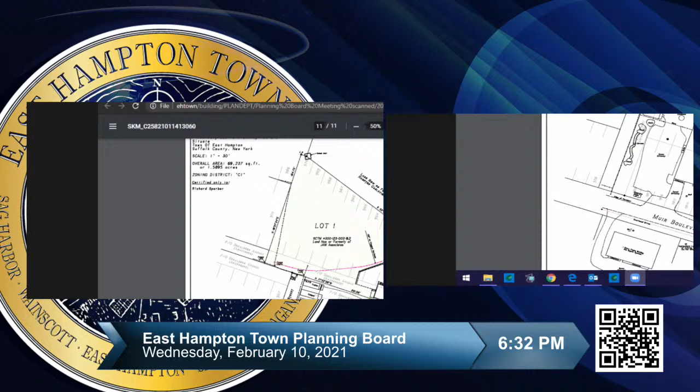Okay, I'm going to put on the screen so everyone should be able to see the lot line modification. An application has been made to modify the lot lines of 80 Old Fireplace Road and 68 Muir Boulevard, represented on the surveys as lots 1 and 2 respectively, to transfer a strip of land of approximately 3,740 square feet from 80 Old Fireplace Road to 68 Muir Boulevard. Both lots are zoned CI, commercial industrial, are partially cleared with improved structures, and located within the Pine Barrens region.

A site plan/special permit for 80 Old Fireplace Road was approved in 2006; however, a valid CO has not been issued at the time of review. A site plan/special permit for 68 Muir Boulevard, named the Sperber Old Fireplace Road site plan/special permit, was reviewed and approved by the planning board in 2019.

The survey appears to depict a stone driveway in the area to be transferred that is not part of the approved site plan for 68 Muir Boulevard. It appears this transferred area is intended to be utilized by the applicant for their commercial business. If the additional lot area is to be integrated into the lot, the site plan should be modified to reflect that. The applicant's narrative has indicated that the previously approved site plan will be modified to construct a building of a slightly different size and shape should the modifications be made to the lot lines.

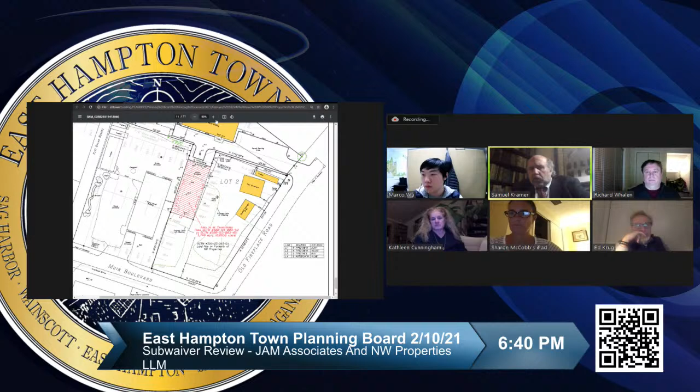Okay, any questions that you may have for me? Let's hear from the committee, and then unless somebody on the board had a question for Rick right now, let's hear from Sharon then. Yeah.

No, this lot line modification makes a lot of sense to me. There's no reason not to — JAM, who's giving up the piece, keeps its lot size in conformance. And then the other one, which is smaller than we'd like, would just add to that, which makes sense. Again, it would make it a more regular size. And if they can move the building away from the property line, again, yeah, I don't really have much to say about this.

I think it makes a lot of sense. Having a drawing of the building might help, but overall you still have to come in front of us with a site plan for us to even consider it. So at this point, in terms of just the lot lines, I think it makes a lot of sense. They're going to have to modify the 68 Muir Boulevard site plan anyways. And if they're coming in with a different site plan, just do it all at once, right? Yeah, it's kind of treading old ground, but in the long run, it'll be better off.

Well, we'll see if we even need them to bring a building drawing. All right, does anyone else have any comments on this?

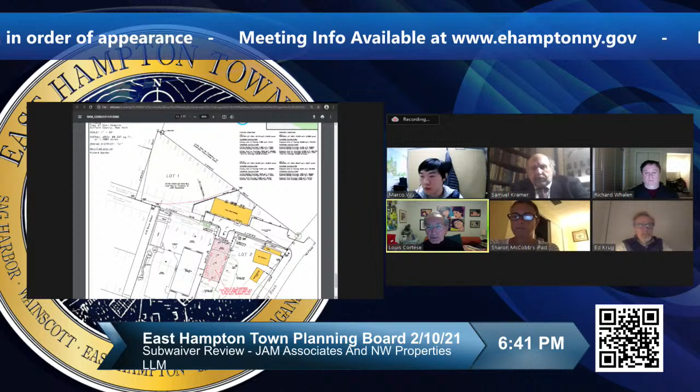Anybody on the board? Rick mentioned that they need to get the health department approval. Why do you need that approval, Rick? The health department requires approval for any lot line modification. They treat lot line modifications the same way they treat subdivisions, so if you adjust or modify the boundary between any two or more properties, you need Suffolk County Health Department approval.

I think the purpose is they want to make sure you don't put your septic system on the wrong lot or in a place they wouldn't otherwise allow. If they had no oversight over the process, people could do things involving their septics that the health department otherwise would not want to occur.

Lou, I'm thinking about a site plan we saw up in the Springs where somebody's septic was on their neighbor's property. I guess Suffolk County doesn't want to encourage that.

Randy, you had something? Question for Rick - this is really about facilitating the applicant's review. I'm wondering, do you guys already have health department approval on the site plan on 68? That's a good question, I haven't looked at it for a while. We certainly applied to the health department, but I honestly don't recall whether we got health department approval on the site plan.

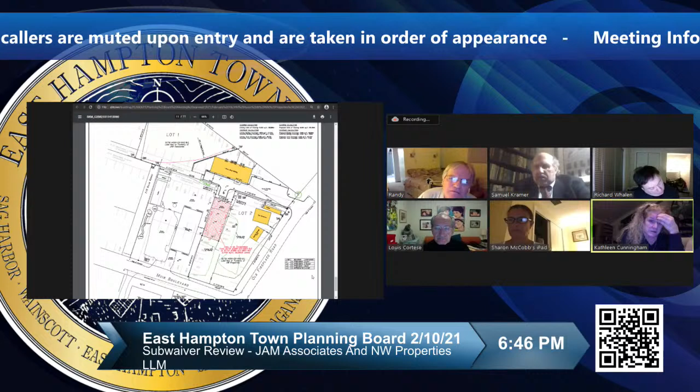My only other concern is that once this is completed, which I hope it will be, allowing lot 2 to grow by this little strip, that the subsequent site plan will continue to divide these two lots rather than make them functionally one big lot, because that's a concern I have with adding this property - that presently that strip of property prevents that from happening.

Mr. Chair, let's hear this and then wrap up. Go ahead, Rick. I understand what Member Cunningham is referring to - the narrative we submitted, the second page of the narrative was wrong.

It was an earlier version that got submitted. Okay, thanks, that's why you saw that. That's fine, I appreciate that. You corrected that - stuff like that happens. You'll resubmit that, Rick, because that was the information I had. I just wanted to make sure we weren't skipping over something since it came from the applicant.

So that's my only comment there, the concern that it'll become one giant lot. Okay, well, Rick, the underlying ownership - are they identical?

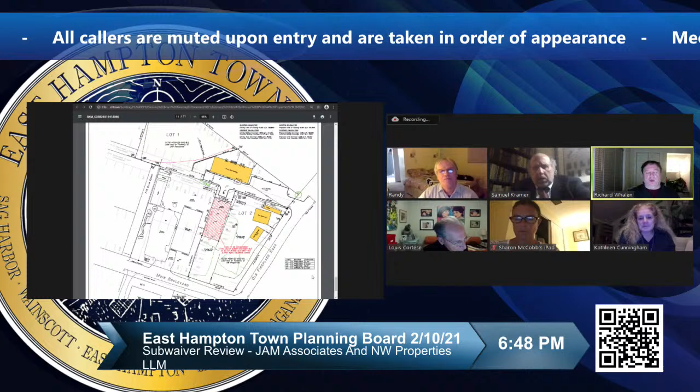No, the westerly lot is owned - they're both Rich Sperber. I don't know for sure if he's the full owner of both, but Rich Sperber is an owner of both. The westerly lot is owned by RCS Properties. So Rich Sperber has an interest, and I think a controlling interest, in both properties.

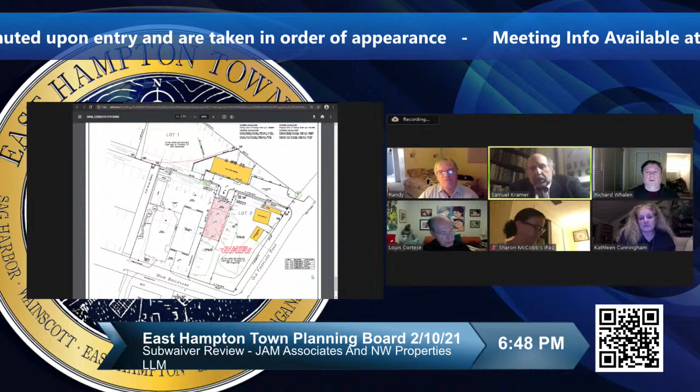To address Member Cunningham's concern, we don't intend to have them cross-linked. That's my concern as well - I don't want to go through the back door of consolidating and making some mega lot here. No, that's not proposed to happen. Well, not proposed, but as a practical matter, one way or the other, that can't happen.

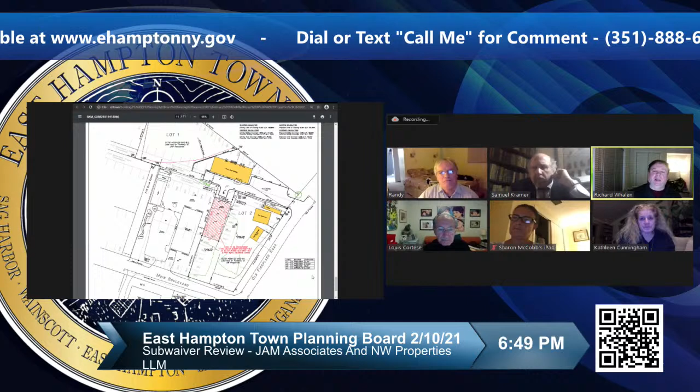Let me just explain. The site plan that you approved on lot 2 - our intention is that we have a slightly larger lot. We would rationalize that building, make it a rectangle. Access will still come in from Old Fireplace Road. We're not going to propose a connection from lot 2 to the RCS property. That's not intended. Okay, that's that. Thank you.

You can put two CI lots together and have a site plan on a 2-acre lot - we do it at the industrial park - but what we're hearing here is there's two lots, two site plans, and they're not related to each other. That's correct, and Sperber Landscaping uses both lots, I believe, but that's basically it. Yeah, that's the big issue, making sure it doesn't become one mega lot. That's really my concern. No, I'm with you on that, Kathy. Thank you very much.

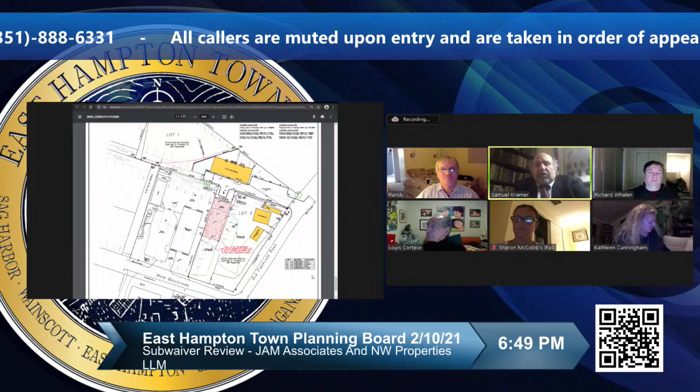So we'll look to hear from you after you take this a little further down the road. All right, next is New Cingular Wireless at Town Hall.

Thank you, I'm representing T-Mobile. Wait, T-Mobile was the 258 Springs Fireplace. Right. So you said, going back to Cingular - that later.

Is Pamela who's the attorney or the representative for New Cingular Wireless? That is Matt Lindblom, I think. Do I see him there? I apologize, who am I looking for? I apologize, Matt Lindbaum, I don't see him here. We do not have Matt in the waiting room right now.

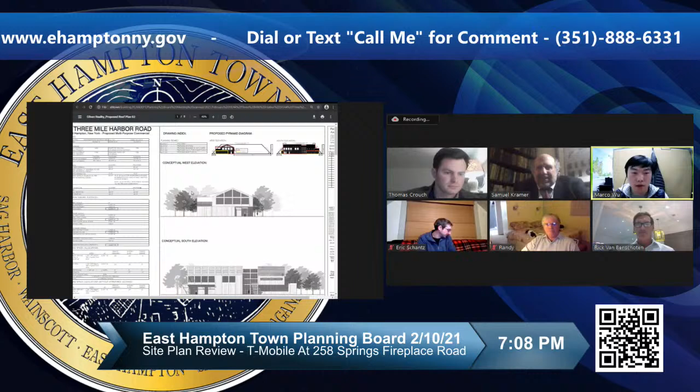Hey, everyone should see it now. Okay, so application has been made to change the use of and expand a non-conforming building by proposing a second floor office space, paved parking space, and extensive landscaping.

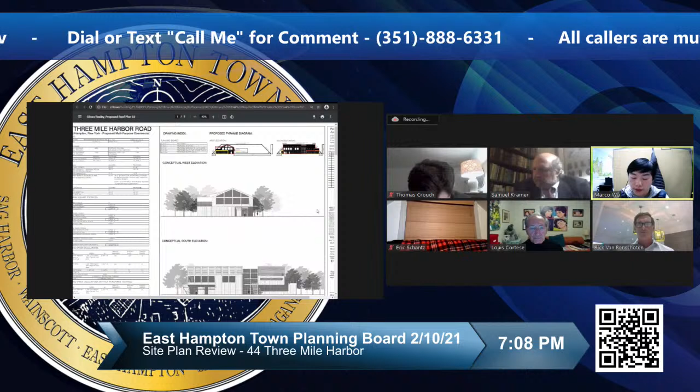The project consists of a 6,659 square foot first floor retail space for a wet retail market, and a 5,968 square foot second floor for 2 office spaces and 2 affordable housing units. A total gross floor area of 12,627 square feet, not including a 6,659 square foot basement and a 1,496 square foot wood deck.

The project has decreased their square footage on the first floor by roughly 200 square feet and increased the second floor by roughly 1,700 square feet. A separate loading zone, revised parking lot circulation, and landscaping along 3 Mile Harbor have also been proposed. The parcel is zoned neighborhood business, cleared of naturally occurring vegetation, and borders a residential zoning district to the south and east.

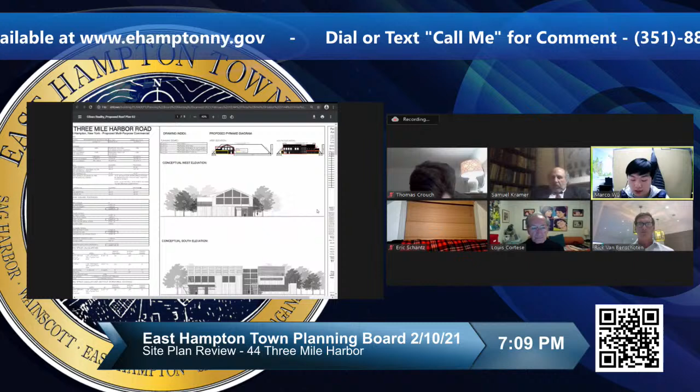Marco? Oh yeah, I'm just zooming in, sorry. Got it. That's all right.

So moving forward, the maximum permitted building coverage is 40%, or 13,985 square feet, and the proposed 6,659 square foot building complies with zoning.

The existing total coverage is 30,135 square feet, where the maximum permitted is 24,473 square feet. The application indicates that the proposed coverage is 25,577 square feet, which remains above the maximum square footage permitted, although it reduces the current non-conforming coverage by roughly 4,500 square feet, and would not require a coverage variance due to its reduction from the current non-conforming numbers.

The existing building is pre-existing non-conforming with regard to setbacks on the northern and eastern side. However, it appears that a proposed staircase to the second floor addition, located to the north closest to the road, is situated within the required side yard setbacks and will need a side yard setback variance.

The parking proposed on the southerly side is close to the property line and does not meet the 30-foot setback requirement based on the double setbacks as it adjoins the residential district. There is a proposed 5-foot landscaped buffer between the parking spaces and the residence.

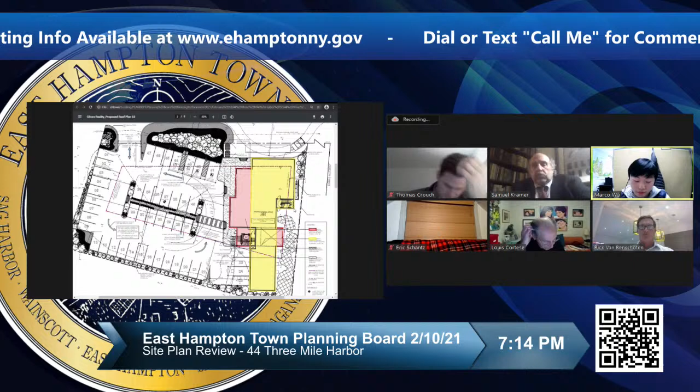All exterior light fixtures must be fully shielded as the same is defined in section 255-1-20 of the town code.

Landscaping beyond the property line and alterations for the proposed access way will require review and approval from the Suffolk County Department of Public Works. An application should be submitted to the Department of Public Works with their improvements and preliminary comments provided to the board.

No formal existing or proposed sanitary plans has been submitted. The applicant has submitted an engineering report from P.W. Grosser Consulting regarding the applicant's current sanitary system. It appears that the applicant is seeking to maintain their grease trap and leaching pools whilst upgrading the septic system to 1 new Fuji Clean CEN21.

It appears it is an IA low nitrogen system, and the applicant should submit a survey to the planning board depicting where the existing and proposed sanitary systems are located. A complete sanitary plan illustrating the location and design of the proposed sanitary system, as well as complete calculations, must be provided to the planning board.

As per Chapter 210-3-2, an IA low nitrogen system would be required for the project. Based upon these calculations and the requirements of the Suffolk County Sanitary Code, the sum of the proposed uses would have an approximated generated sanitary flow of 880 gallons per day. The total allowable generated sanitary flow for this 0.8 acre parcel in Groundwater Management Zone 5 is 240 gallons per day. It should be noted that all commercial properties are allowed a minimum flow of 300 gallons per day, regardless of the size of the parcel.

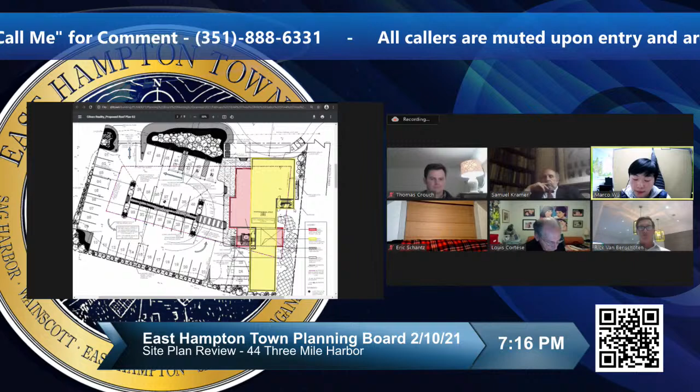The applicant has submitted a copy of an approved food establishment permit from the Suffolk County Department of Health Services, dated May 22, 1994, that states that the maximum occupancy at the time was 360 persons and has indicated an allowable 3,600 gallons per day, which is 10 gallons per day per occupant.

The applicant has indicated that the site is grandfathered for 3,600 gallons per day of flow. However, a recent revision to Article 6 of the Sanitary Code appears to have eliminated grandfathering sanitary flow when a site has been vacant for 2 or more years, and a variance may be required. The applicant should provide additional existing and proposed sanitary information as mentioned above. A condition of site plan approval will be approval from the Suffolk County Department of Health Services.

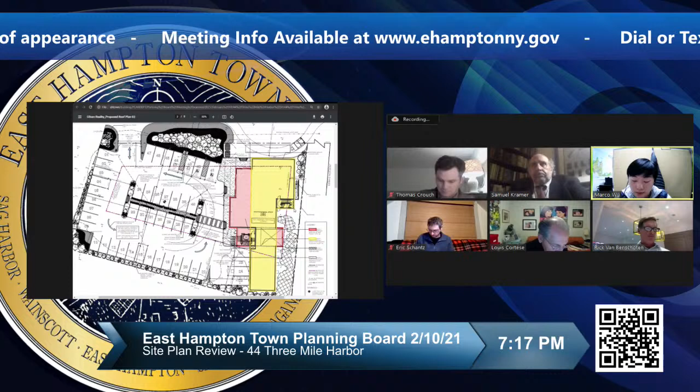No additional drainage or runoff mitigation plans have been submitted at the time of review. Spot elevations indicate that the middle and southern parts of the property will be the lowest areas. The applicants should provide a drainage plan with drainage calculations and structures in their project, that will mitigate impacts from potential flooding. A certain list of plans that have been omitted in the original application submission should be submitted as part of site plan review.

Survey of existing buildings, structures, and uses with lot area and floor area for each floor. Revised survey that depicts the applicant's proposed improvements and alterations. Revised site plan that depicts all existing and proposed sanitary and drainage systems. Elevation drawings, east and south, west and north. A lighting plan as detailed above, and a landscaping plan as detailed above.

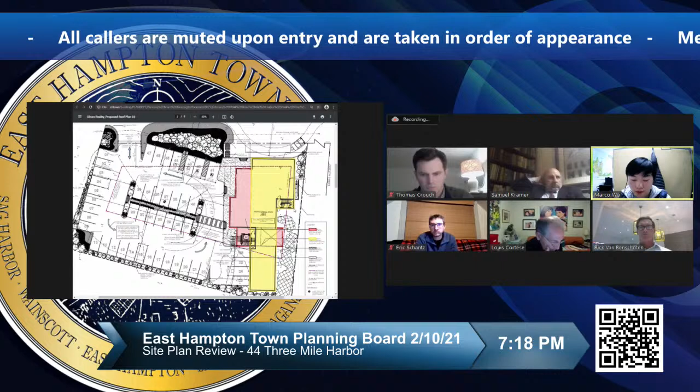The planning department has not yet received comments from the chief fire marshal regarding fire safety or ADA compatibility at the time of review. The proposed project will require approval from the ARB, and an application should be submitted to this agency if the applicants have not already done so.

The second floor will have a gabled roof with a height of 35 feet. A portion of the roof above the offices have been proposed to install solar panels, and a portion of the roof above the apartments have been proposed to be a wooden deck. No information has been submitted regarding the color of the building or materials used for siding.

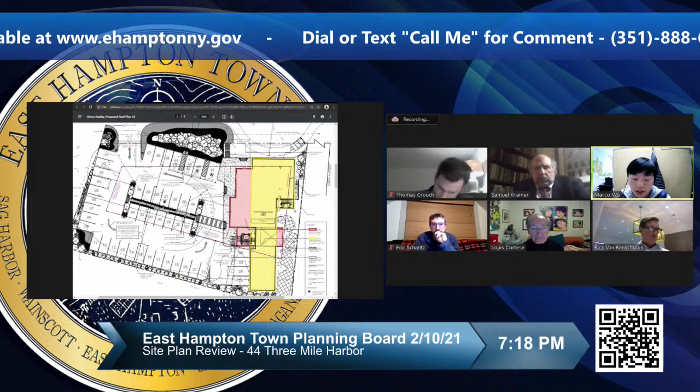In conclusion, the revised plans have made alterations that include changes to the size of the building, changes to the layout of the parking lot, the need for a pyramid law variance, and the inclusion of 2 affordable apartments. There are remaining concerns the applicant should address, including sanitary flow information, limited parking spaces, lighting near residential districts, and changes within the jurisdiction of the Suffolk County Department of Public Works. Variances required are a pyramid law variance, a setback variance for side yard, and a parking variance.

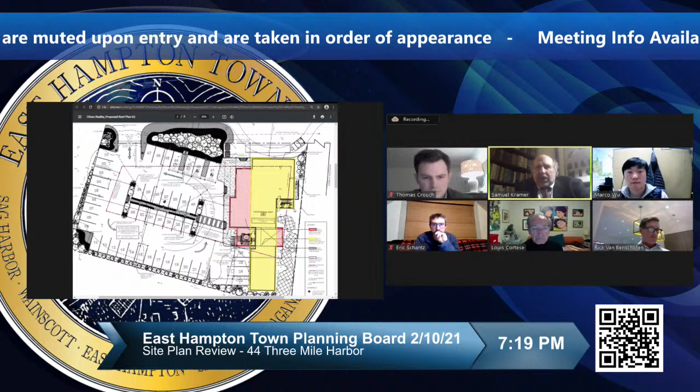Thank you for that very thorough and helpful report, Marco. Appreciate it. Does the applicant wish to be heard?

Mr. Chair, I'll speak first. Richard Whalen. I haven't been previously involved in this site plan. The architect, however, Pamela Glazer, is here tonight, and so is Rick Van Benschoten, who is the owner. So you've got 3 people here tonight. If there are questions better answered by Pamela, I'll have her address those matters.

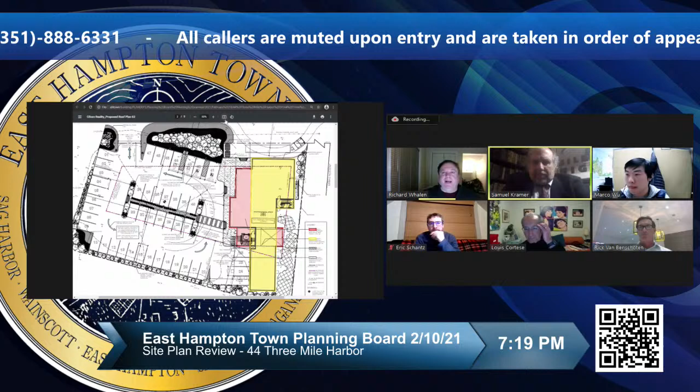I have been involved with the property in the past. I represented Sylvan Realty over a decade ago before the town board when the property was rezoned from commercial industrial to the current neighborhood business zoning category.

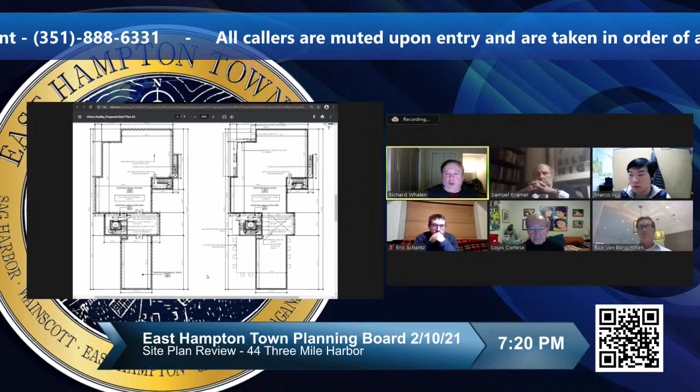Just some quick comments on Marco's memo. First of all, as Marco noted, there are no coverage variances needed for the project, and in fact total lot coverage will decrease substantially, by about 5,000 square feet. The current proposal does show the stairway to the second floor that would encroach currently into the northern side property line. I've spoken with Pamela—we may be able to adjust the plan, revise the building design. You can see there on the right, the yellow with the staircase, because that is 2 stories in height.

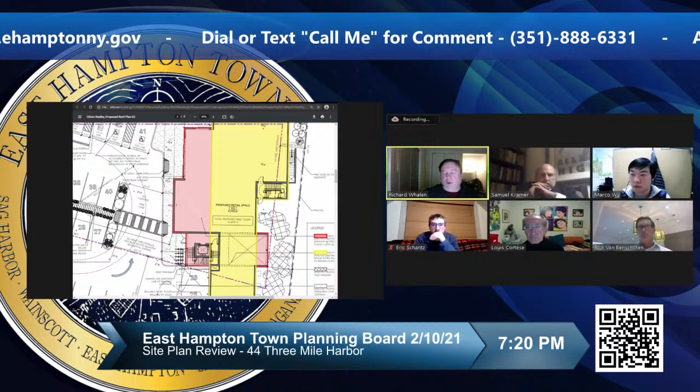So we may be able to pull that back. The second story there is new, and if we can retract that into the building, then we would avoid a side yard variance. So we may be able to do that. You're talking about that little bump out on the side? Yeah, right where Marco has the cursor. So we may be able to pull that into the building, if you will.

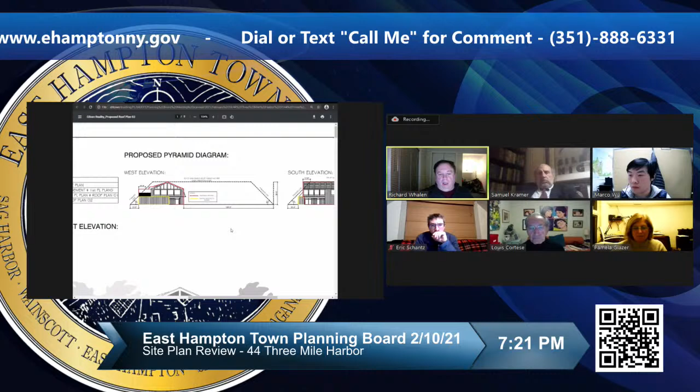Or rotate it, probably. I'm not sure that we can eliminate the pyramid law setbacks. We might be able to minimize them somewhat, but the pyramid law setbacks are kind of a combination of the gable ends—you can see that's a gable end, I think facing the road. So the gable ends, the ridges encroach within the pyramid law, and our decking, our second floor decking, the railings are within the pyramid law. If we can avoid and minimize those, we will, but I'm not sure we can completely avoid the need for pyramid law variances.

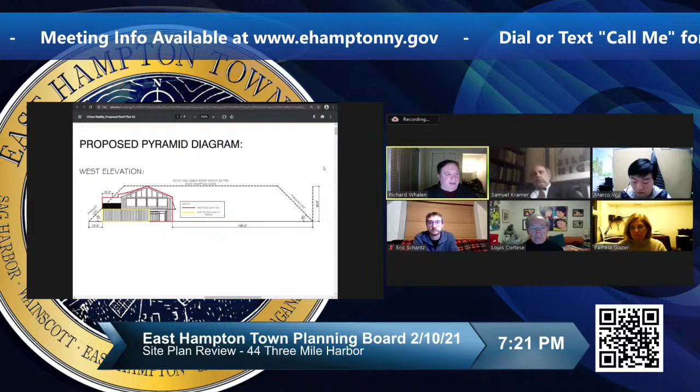And regardless, we are in a position where we would need a parking variance of 11 parking spaces, so that would send us to the Zoning Board of Appeals regardless. We accept the correct number of required parking spaces as 58, not 59, as Marco noted. The existing number of spaces on the property has never been properly calculated—I remember this as an issue even back when I represented the applicant in the rezoning.

The current parking lot, as you know, is unpaved and not lined. It predates zoning, it predates site plan review, so there's no actual approved site plan layout. And so we don't really know the number of parking spaces that we have right now.

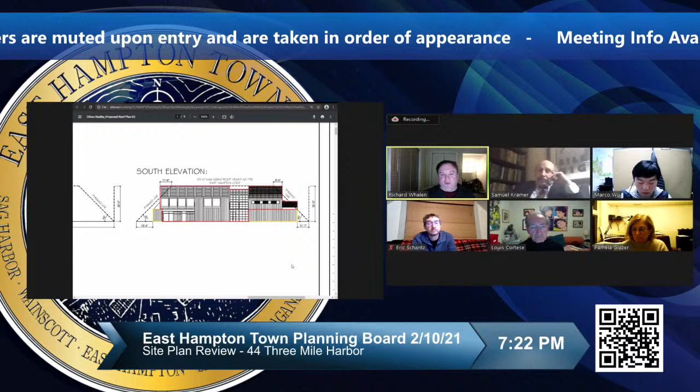The loading dock—Marco's memo asked questions about the loading dock. We can't really tell you the hours of operation or the number of trips that will be employed concerning the loading dock because we don't know who the retail tenant will be. I think as a board you should assume, in accordance with typical delivery practice at retail stores, especially if it's a food retail store, you'll get deliveries early in the morning. Trucks and tractor trailer trucks will try to arrive often before the store is open, so you should anticipate early morning use. Beyond that, I can't really say much because we don't know who the tenant will be.

We do understand we'll need Suffolk County Department of Public Works approval for the landscaping in the Three Mile Harbor Road right of way. We do believe that can be obtained, but we will have to work with the DPW on that.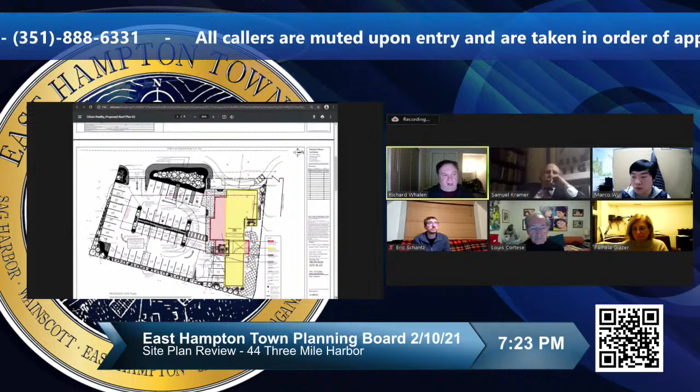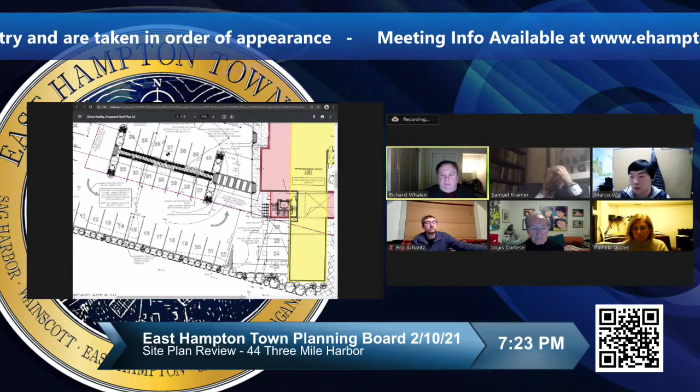Likewise, we will need Suffolk County Health Department approval, and the issues that Marco raises in the memo concerning the pre-existing sanitary grandfathered flow on the site are important. But we will address that with the health department, and we will supply those comments to the planning board.

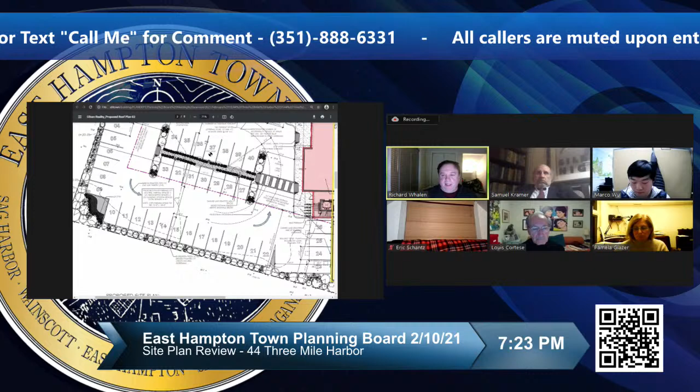I'll note that of the 880 gallons per day currently proposed in the site plan, a large proportion is attributable to the 2 workforce housing units, even though they're only one bedroom each. We'll provide additional detail on the drainage plan and calculations.

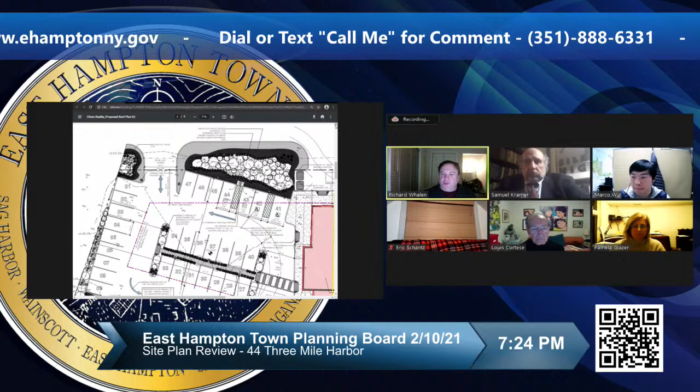We think it's premature at this point to provide more detail with regard to the landscaping and lighting plans. We need more certainty from the planning board, not to mention getting a variance from the zoning board for the number of parking spaces. We need more certainty from the board on the likelihood that this project will be approved in its current configuration, and I hopefully will get some feedback from you in the next few minutes.

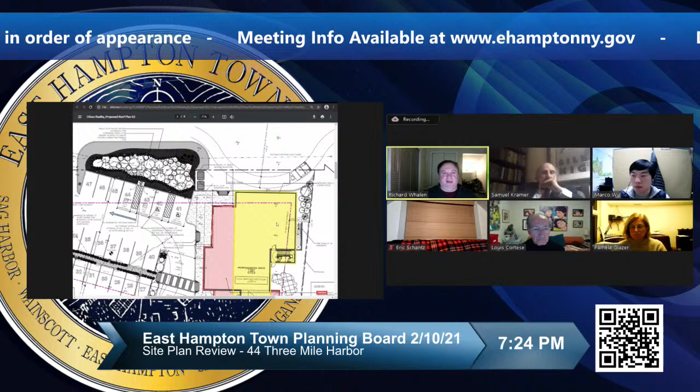Suffice it to say that we're confident we'll provide a landscaping plan at the end of the day that you'll be satisfied with, and a great improvement over what's there now. Similarly, we'll have a dark sky compliant lighting plan you'll be happy with. I don't think there's any doubt we can do that, but those would probably be housekeeping measures towards the end of the site plan process, at least how we see it.

It's a big parcel, and lighting and landscaping are crucial, you have to approve it. So we think we'll be able to satisfy you. But before we design those things, those are somewhat time consuming and expensive to get into. We really want to know where the project is going before we get to that point.

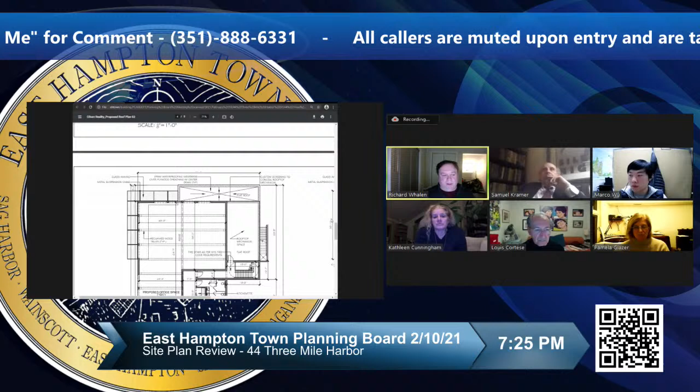I would just wrap up by saying there are significant benefits associated with the plan as proposed. It's going to be a much better site appearance. You'll have a safe, very well-designed parking lot. I think the layout of the circulation within the parking lot is very sound design, again a considerable improvement over what's there right now. There'll be improved drainage and landscaping.

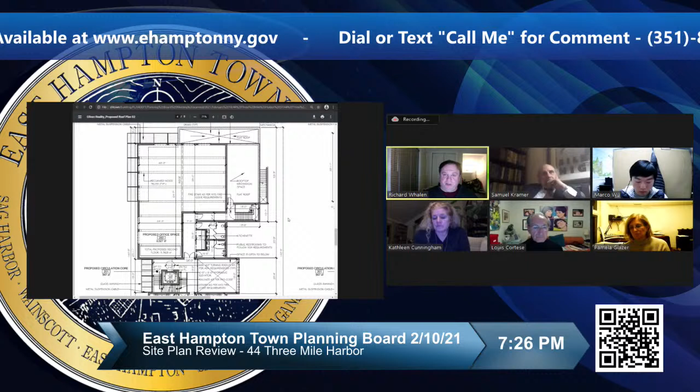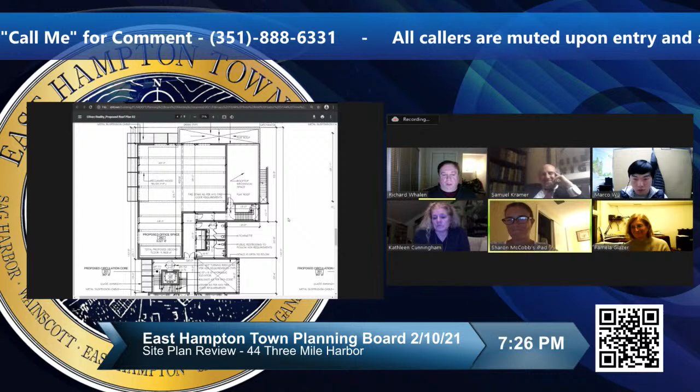There'll be a new low nitrogen sanitary system on the property. There will be dark sky compliant lighting. There'll be 2 workforce housing units as currently proposed. And also, finally, there will be the permanent discontinuance of the nightclub use, which the town has long wanted to disappear. So those are my comments. If any other questions, I'm happy to answer what I can. And again, as I said, Pamela Glazer is here as well.

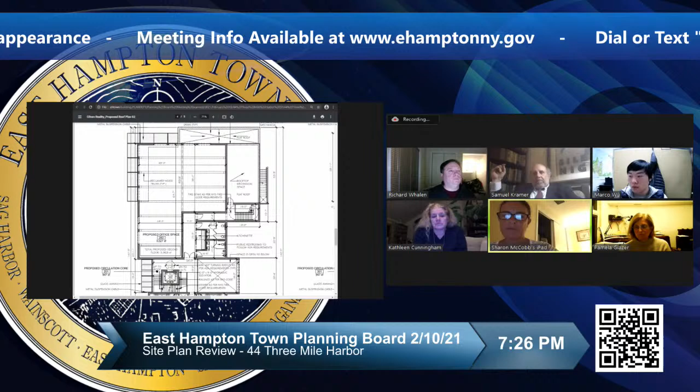Yep. So I just want to first thank the applicant and everybody for really working on this. What I'm looking at right now is a huge improvement from what we saw 3 or 4 submissions before, and it's looking pretty good.

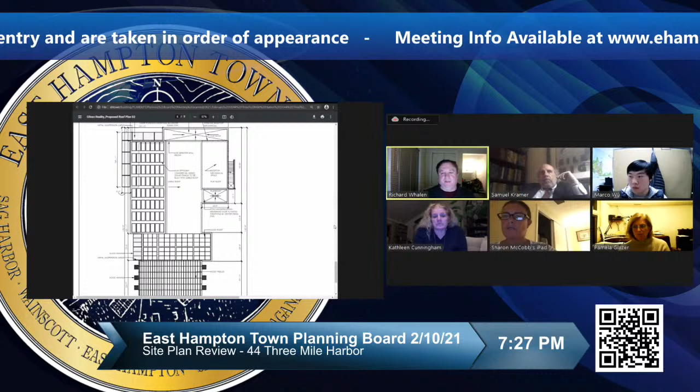I guess one of the biggest questions I have, if the sanitary system and the drainage structures are not on this drawing, how do we know that this still all fits? Let me just say, I forgot to mention, we do need to supply you with that, the drainage. I said we'd provide more detail on the drainage plan that would include the location of the sanitary system.

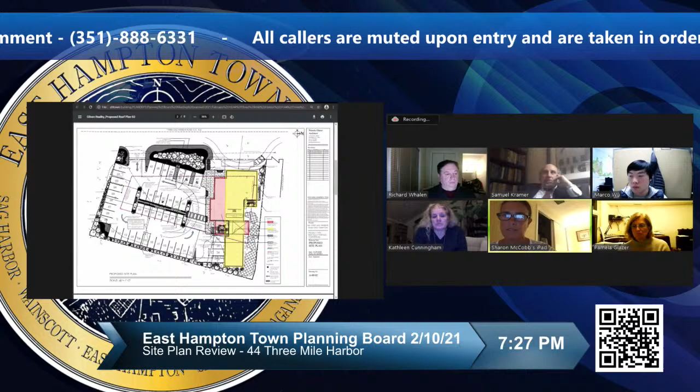Because as we've gone through this, we're slowly warming up to the idea of less parking spaces. But if the drainage structures and the septic get involved, and all of a sudden we've got even less spaces because of those 2 big items, then we're not really looking at the right plan here, I guess, is my concern.

I think, like I said, it's an improvement from what was there, right? The landscaping is going to buffer the parking from the residences. You've reduced the size of the building. The parking lot is going to actually work now. You've pulled it away from Oakview Highway, which is, I think, a huge improvement. Having those 2 affordable apartments, I know makes it so that you have to provide 2 extra parking spaces, and then sort of does something to your sanitary flow, but we appreciate that.

I think those two big missing pieces just make it incomplete in my mind. But other than that, I think it's going in the right direction. I think it's fitting on the property a lot nicer than it was. I don't have much else to add.

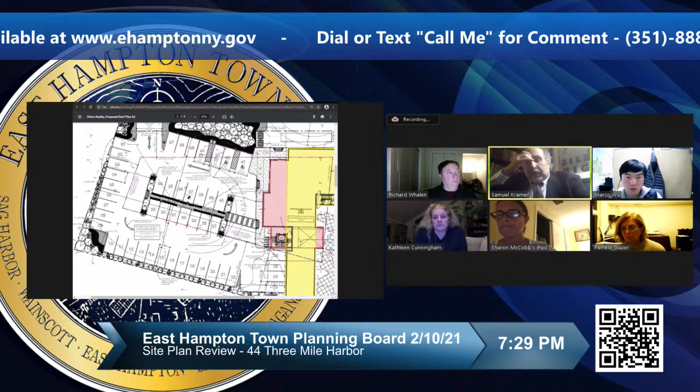I appreciate what you've been doing with this project, and getting the underground parking was a big one. But the other thing is that the water table is so high here, so that's the other thing that makes the septic so important to have on this, and where you're going to put it. Aaron, how do you feel about the applicant providing additional details on lighting and landscaping at this point?

I agree with Rick. I think they've got the zoning board to deal with. If they don't get the parking variance, then that's it, so I don't mind not having that at this time.

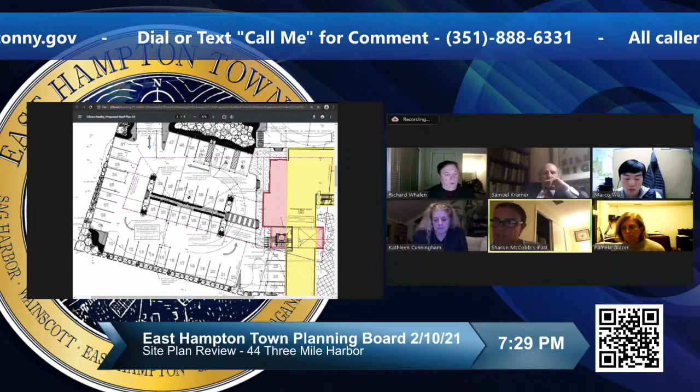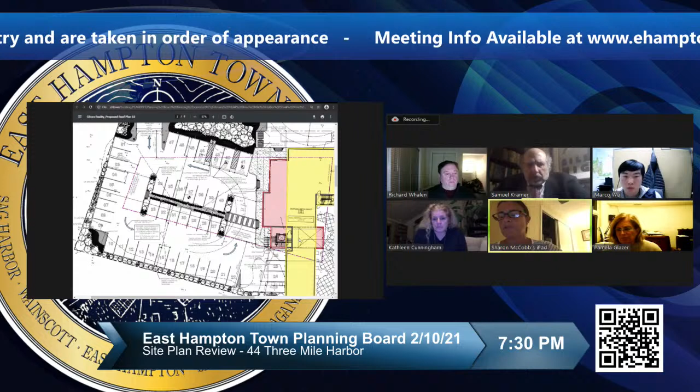I wanted to focus on that because those are the questions that staff had for us in the memo. So, does anyone have any questions, particularly that they'd like to direct to the applicant or to Marco? Because it sounds like the applicant's next move is going to have to be to go to the ZBA and deal with their variance issues.

Well, are we going to go around the board? I don't know that we need to go around. I mean, if anybody has—well, I've got a couple of comments. All right, go right ahead, Lou. I don't want to hold anybody back. We do need to address waiving the setbacks, which we've already indicated we would. Maybe the applicant wants some more certainty on that, but Lou, go right ahead.

Yeah, there's a number of issues on this, and I'm also glad that we've gone through three or four different versions, and we're starting to get closer to something that's doable in my mind. I'll just focus on bringing up two concerns that I have with regard to the project, and that's the sanitary system and the drainage.

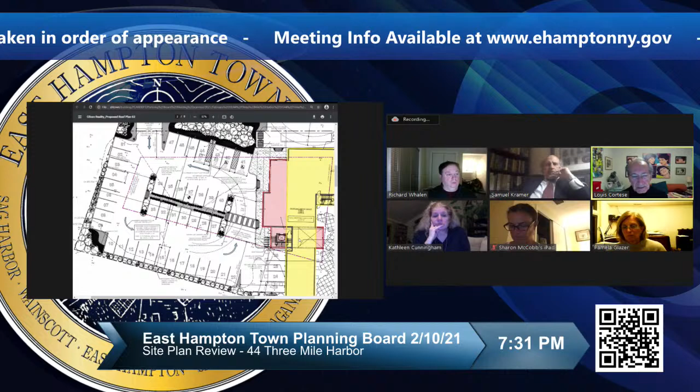When I first looked at it the last time we reviewed this, I was sort of appalled that the flow rate is almost 900 gallons per day, and the maximum allowable for this property is 300. But I looked into it further, and this is notwithstanding where they say they're grandfathered. But as Marco pointed out, it's been inactive for two years, so they're no longer grandfathered. But then they could possibly get a variance from the health department, which, as I understand it, isn't that difficult to get.

So the point I wanted to make is that they are putting in an IA system. I would ask the applicant that in addition to that, if they could make some mitigation enhancements to the sanitary system to bring that nitrogen level even further down than what is typical—I think typical is about 19 milligrams per liter. If they could bring it down even further, that would help, because it is in a groundwater management zone, and that's what concerns me about the sanitary flow that they have. So if they would look at doing that, that would be a big help, and that would be a big improvement in my eyes to move this project along towards approval, because that is a very big concern of mine.

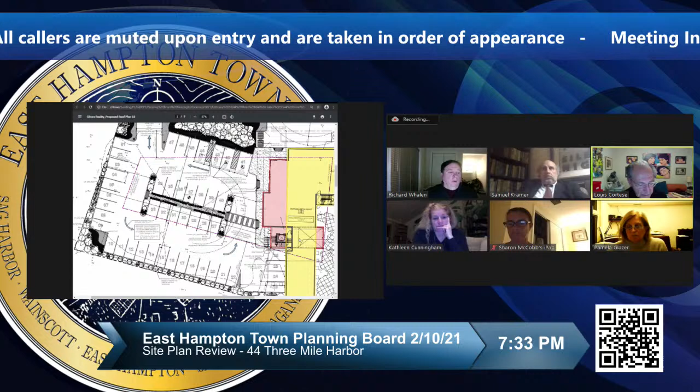The other thing that I wanted to bring up is the drainage. I know that we don't have a plan right now, but what I'd like to see when we get to that point is some kind of subsurface system with catch basins that feed to a filter, something of that sort that would alleviate my concern for this property being in the groundwater management zone that it's in.

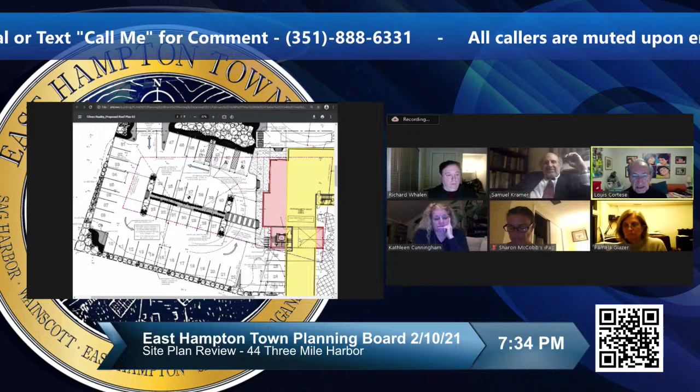So those are the two requests, or to put it a different way, the two concerns that I have. If I feel the applicant is moving to mitigate those concerns, it would make my job a lot easier to move towards approval. So that's my comment. Thank you for that most diplomatic set of observations.

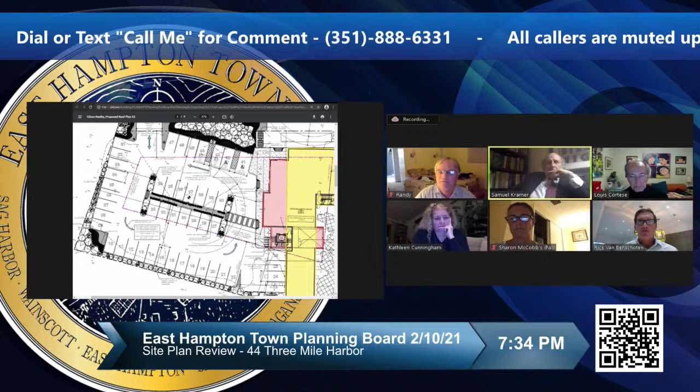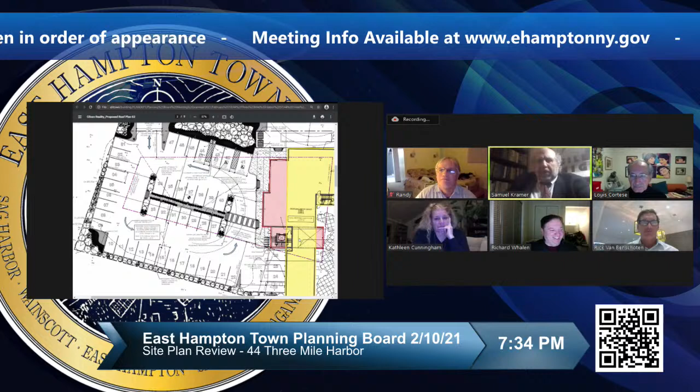All right, I saw Kathy, I saw Randy, and I see the applicant. I'm not sure if the applicant wants to say something. I didn't know if we should just respond, and Pam and Rick maybe would jump in. You're welcome to, go right ahead. Well, did you want to finish your discussion to that last question? You might want to make sure your attorney wants you to say something. Well, I was going to wait till you finished your work session discussion. You know what, you know me, I'll jump in at any time. You're right, Rick, that way we won't break the thing up. I thought there was an immediate comment, but let Randy and then Kathy go, and if anybody else has anything, then we'll turn it back over to you. So, okay Randy, you had something?

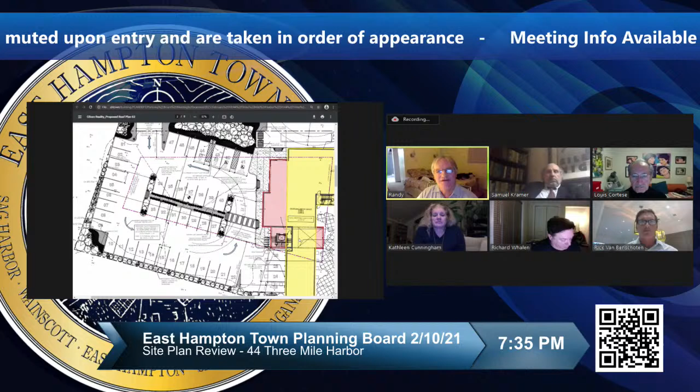Yeah, I agree with Sharon. I think we've really come a long way with this. It looks good, it's got the apartments, it's got the alternative system. And I understand the challenge for the design team and legal team to try to get as much usable retail space and office space for their client. I just think this is still too much.

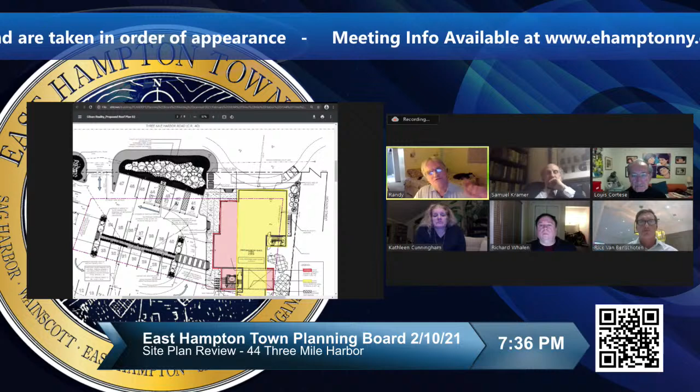I'll tell you what I mean specifically. The loading dock—first of all, the drawing shows the tractor on the tractor trailer in the county right of way, off the applicant's property. It also shows two other... Randy, sorry to interrupt, I believe Pam showed it just so you could see how the vehicle would back in. Yes, the idea is the cab would turn onto the property, it wouldn't still be in the right of way. Correct, it fits in there.

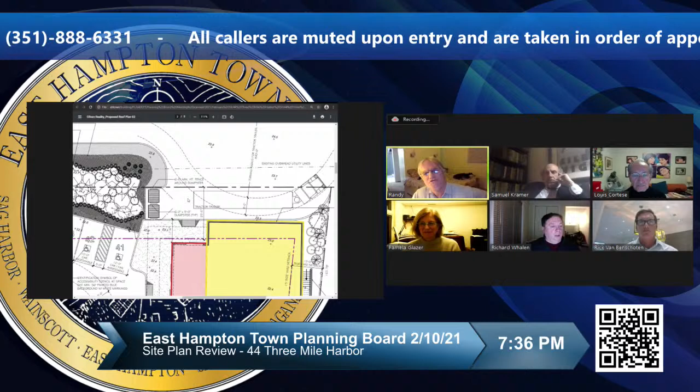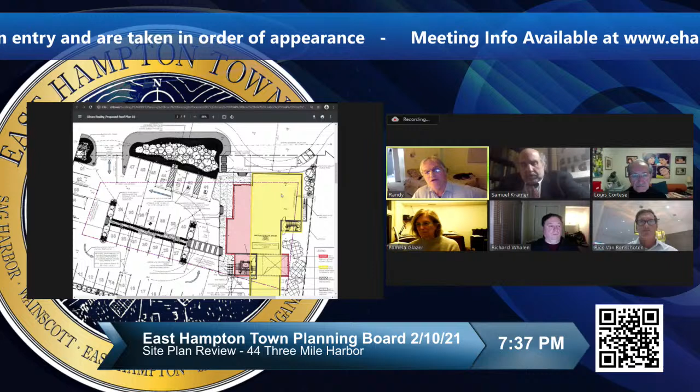Even so, there are now two other curb cuts proposed here onto Three Mile Harbor Road, so you now have three curb cuts—well, three of what the county calls a curb cut onto their road. I just think you're trying to do too much, having a loading dock, dumpsters, and possibly grocery delivery right there next to the right of way. My take is you have to give up a little more retail space and get closer to reducing the parking variance. I don't know what you do with that loading dock, but I don't think that works, and I don't know that the Department of Public Works is going to think it works either.

So that's basically where I'm at. My other colleagues have covered the other stuff. Thanks very much, Randy. Kathy, did you have something? If you don't, you don't.

No, I was just listening to what Randy had to say, and I think that's a really good observation. I agree with everybody else. I just wanted to thank the applicant for reaching for the stars and settling on the earth, and making the adjustments they have made. Just to give them some feedback, which is what they're seeking from us tonight, my understanding is on what they've proposed, so they can go forward and apply for the variances they need.

I think the drainage system is very important. I agree with Lou about any kind of landscaping that can include plantings that help with runoff and nitrogen filtering, although I suspect the IA system will probably be adequate. But I don't expect to see that until they determine how much design flow is needed. We can't ask them to design a system until they know how much they need, so I think it's fair that they haven't yet submitted that.

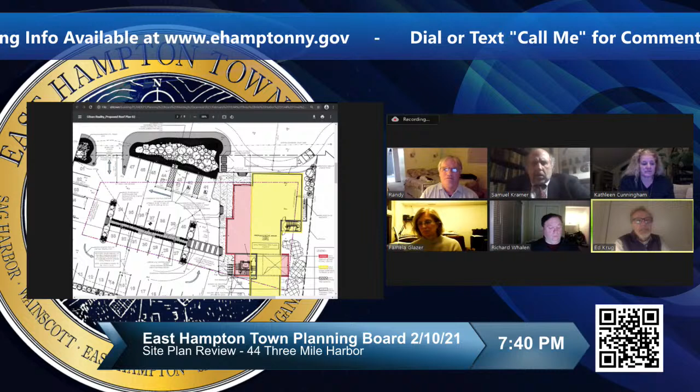I just want to add my voice to everyone else saying that we've come a long way. This is really a huge improvement from where we started. I'm especially grateful that you added the affordable housing units back - that's really important to us, as you know. Even though it adds to the sanitary flow problem here, we're grateful to see it.

But I tend to agree with Randy that there's still a little too much going on here. I'd be happy to see some of the retail space taken out so we can come into better compliance with the parking, change up the sanitary calculations a bit, and provide an easier in and out for the loading dock. I don't think you have to sacrifice much to get there, but I think it would improve the situation tremendously if we could scale down a little more.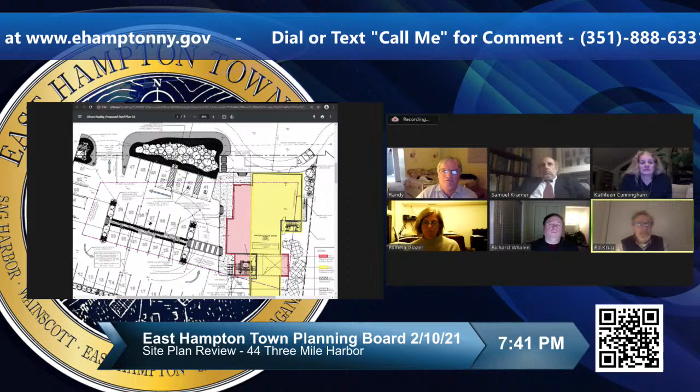I absolutely agree with Sharon's observation that it's really important to see the impacts of a new sanitary system and whatever drainage accommodations need to be made, to see if that affects your ability to squeeze 47 spaces on here. If it's less than that, we're really going to have a problem with the ZBA. So those are my observations - I still think it's a little too much on the site, and it's really important to get the sanitary and drainage shown so we understand how that impacts the overall site plan.

Thanks, Ed. Ian, it looks like you're the only one who hasn't said anything. Yeah, just waiting my turn. But I largely agree with what everybody else has said. It's come a long way. You're still trying to do a lot, and I understand you're coming down in some ways from what exists.

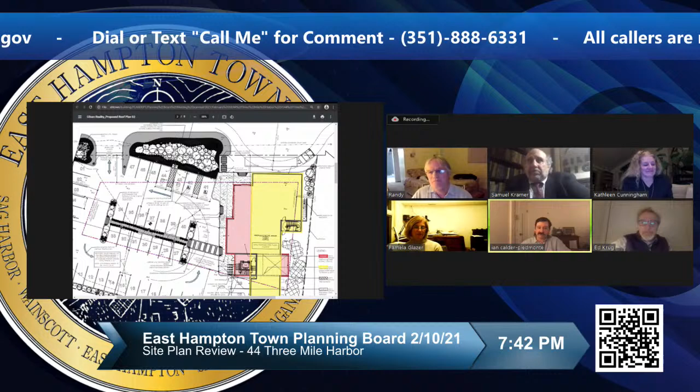But if you get these variances, I think you have a fairly good plan. I'm not saying I'd recommend those variances be granted, but I wouldn't oppose them either. I just think if you convince them you're good on them, we can treat this application as if it meets our code at that point.

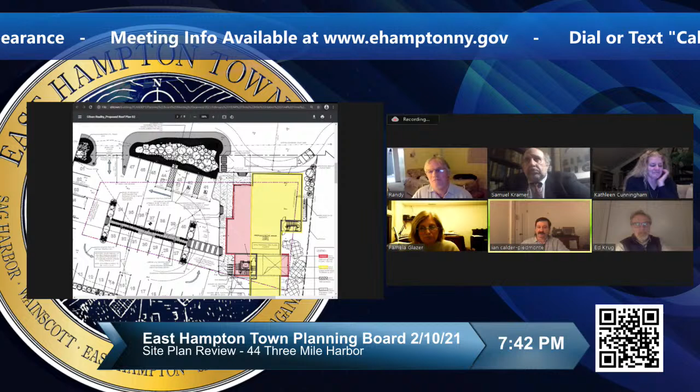I think Randy brought up a really good point, and that's the one I wanted to make too - the loading dock is problematic. You'd have a semi truck pointing north down 3 Mile Harbor with no clear way to turn around, and there's not a lot of destinations in that direction. Maybe there's enough room to do a full turn there, but it doesn't look like that's what's designed. You can go down to the next street, make a right, and come around it.

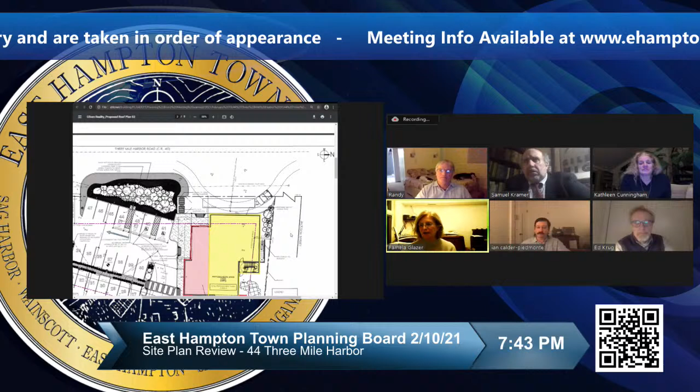You're muffled, Pam. You were muffled there. You want to try it again? I think you can go down to Jackson, make a right, come around - it's an easy loop, not a complicated loop.

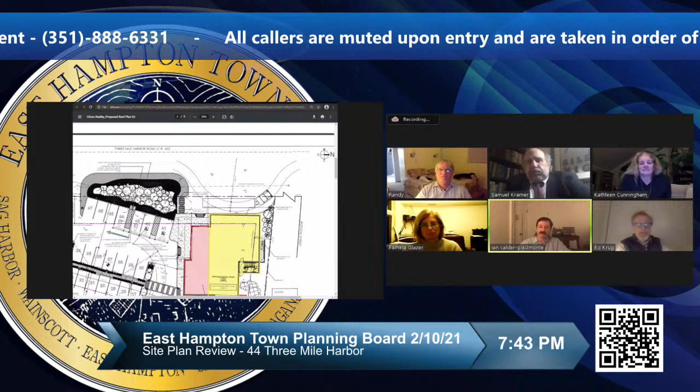That's part of my issue with that. I think Kathy brought up a good point, and Randy too, that Oakview is very close, and that Jackson, 3 Mile Harbor, Oakview area is a sort of strange intersection. I frequently pass through it, and there are issues there. So anything that would complicate it could be problematic.

Ultimately, Randy brought up the point of curb cuts - they're not literal curb cuts, but having 3 access points, ingress or egress, for one property might be problematic with the county, so you'll need to get that approval too. And then there's just the fact that it's right out front of the building.

I'm not saying that if you get DOT approval or Department of Public Works sign-off, this couldn't work, but I do think it should be reconsidered if at all possible. On the drainage and septic point, I think it's incredibly important, but I think it's wise to wait until we have a settled plan. The applicant should know they'll have to fit that with whatever is decided, so I'm sure you're considering that along the way.

Landscaping and lighting can definitely wait until we settle on a general flow and site plan here, so you're not wasting your time and money. It's come a long way. I certainly don't think it's a slam dunk, but those are my comments for now.

Thanks very much, Ian. Let me just ask around, how do we feel about waiving setbacks? Is there any opposition to that? I'm okay with waiving the setbacks at this point. Anybody not okay with waiving the setbacks? All right, so you've got that.

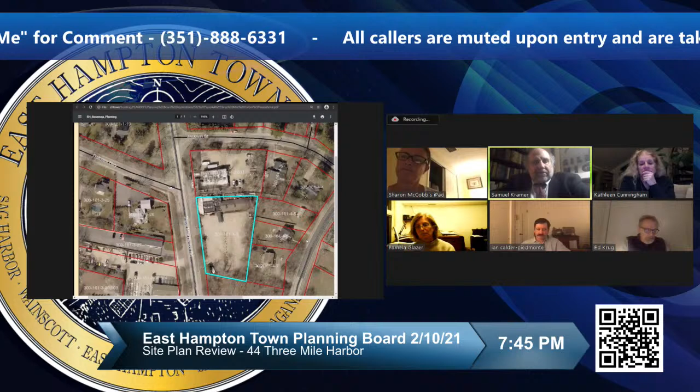I think the public hearing, as always, is going to be very important. I want to give the applicant the sense that we've indicated it strongly, and now we've indicated it strongly again, so they know that's where we're going on that one issue, which I know is important. I guess the next thing they'll do is open up a Tuesday night for themselves and go over to our colleagues at the ZBA.

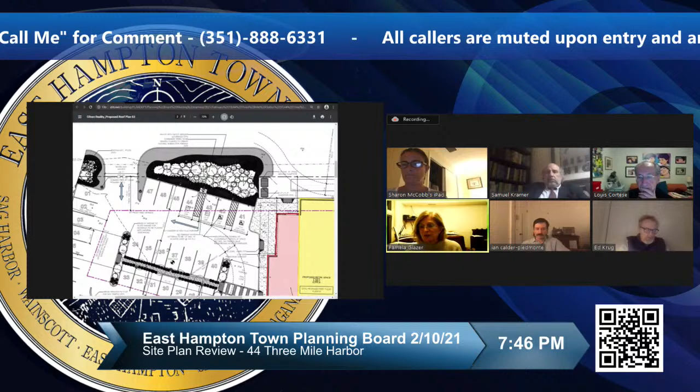Just one comment, if you don't mind, about the drainage and the sanitary system. Go right ahead. We've provided, albeit part of the Suffolk County Public Works area, that low spot to become a bioswale, so we would be planting and it would become a filter for runoff from 3 Mile Harbor Road.

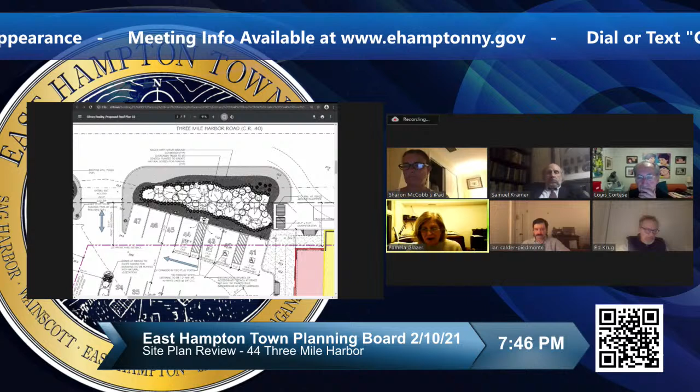I think that's a really important way to deal with a lot of the water coming off the highway. Also, the walkway between the parking spaces in the center of the parking lot would be a low point. We'd have a walkway, and underneath it water would be able to run down into it, so we'd pitch toward the center as well.

The previous septic system was laid out on one of the drawings from the health department, and it was a much larger system than we're actually requesting, and it fit with no problem. Since we'll be reducing the number of tanks, I really don't see it as an issue, but we will have it completely designed along with drainage, so we'll know 100%. It's waiting for the final footprint and to know the size of the system that makes all the difference.

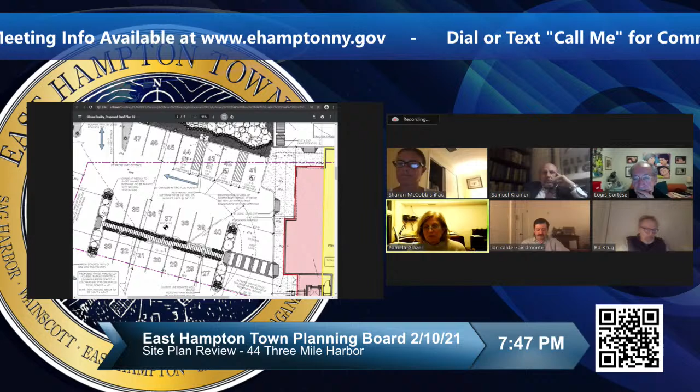In terms of being aggressive, we really haven't changed the footprint much from the original. A lot of the addition is to the second level, so from a building point of view, it's not a much larger impact than what's already there. And we are definitely cleaning up the site completely. Maybe we don't provide a loading dock — maybe it's not necessary, so that might resolve that problem altogether. We don't know who our tenant is, and it may not even be a requirement, so we thought to put one in, but it may not even be an issue — maybe a moot point.

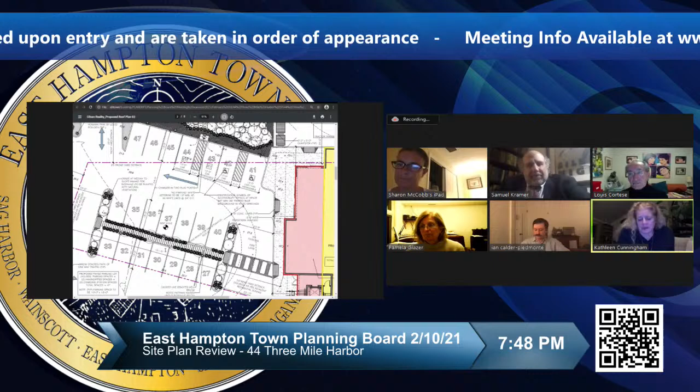Yeah, that could be a good way to go. And thanks for that bioswale — that's very encouraging, especially considering the pitch at that point.

The plate is definitely lower than the road. At one point we were talking about a new building, in which case we would have probably filled the site in to some degree, but because we're using the existing building, we can't do that now, so we have to keep that same elevation. We have to deal with it in terms of pitch and drainage, and the bioswale is a great asset — it's terrific.

The only thing I've heard about this application in terms of potential use is as a market of some sort, and I would expect that given the size of it, you're almost certainly going to need or want to present to a potential tenant a loading dock. So I recognize that, but at the same time, you've heard some valid comments about the positioning of that.

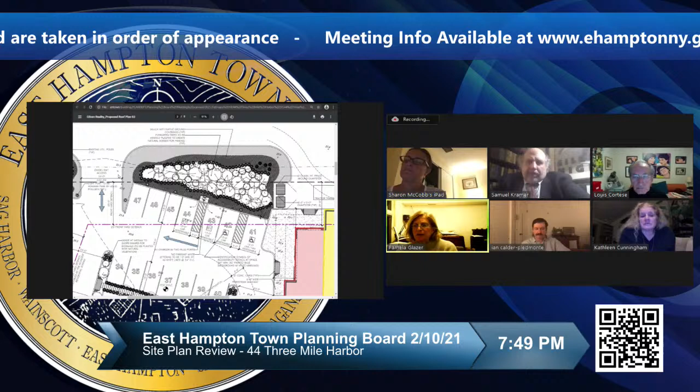So you're going to need to. It is located within our property line. It is not in the town, in the Suffolk County Public Works area. And there is a very large shoulder on this particular road, so I feel like we're way off the actual roadway.

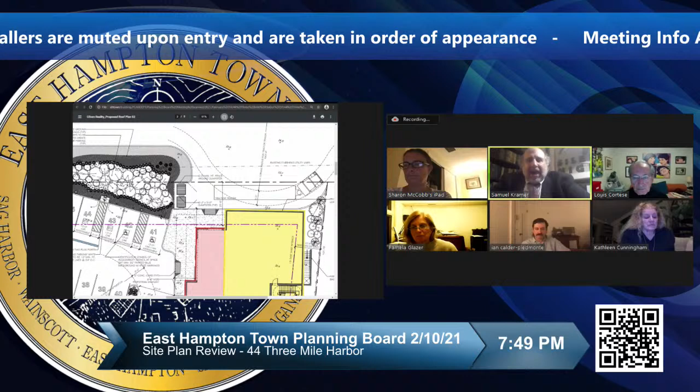Well, what I'm thinking is you really need to recognize that as a planning board, when we look at something like this, at least speaking for myself, and I imagine a few others, we think about what happens five years from now when anybody coming down that road knows there's a problem over there because there's always a truck, and then they say, how did they let that happen?

But all right, let's go on. We appreciate it very much. You go, like I say, to the ZBA and do what you must, and we'll see you again. Very good. Okay, thank you very much. Thank you. Okay, thank you all. And again, Martha, thank you for that report.

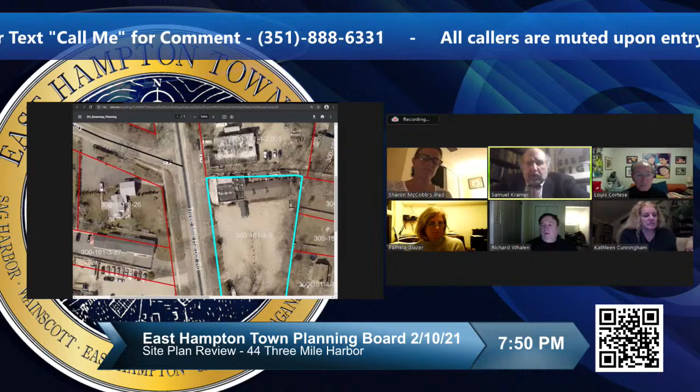Do we have the representative from New Cingular? Are they with us yet? I don't see them. If you're referring to Matt, no, I do not see him. Is there anyone on the phone? There's nobody on the phone lines.

This one involves sound issues, correct, with the generator and all that? Yes. Thomas, what do you think? Normally I'd say wait for the applicant, but this one was noticed last week and he didn't appear last week. He was noticed by Jody on Friday and by me sending the link today. So, I mean, all right, then let's go with it. Yeah, I think if the board wants to go with it, then that's fine. Obviously, I think some of this, just knowing it, may require something from the applicant. So that's my concern, but you know what?

Let's hear what Eric has, and who's the committee, the board on this is Kathy. So, all right, Eric, go right ahead. Okay, hopefully you can see the plans here.